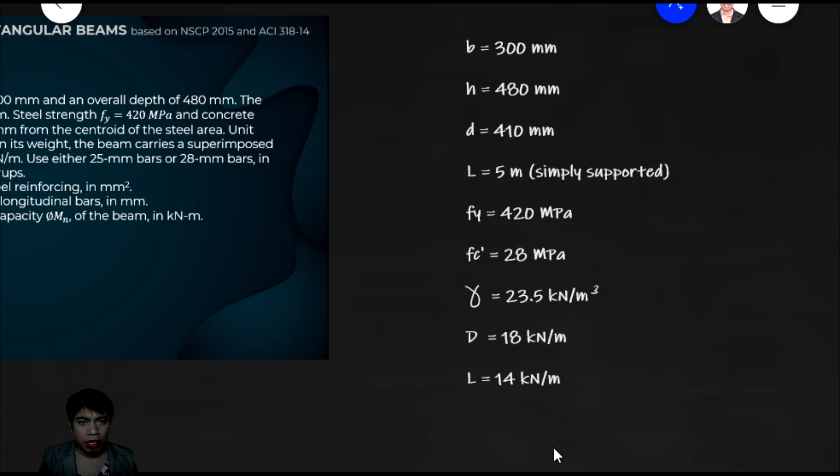So I listed here all the given values. Our beam width is 300 millimeters. Our total depth is 480 millimeters. Let's place this on our beam drawing. So our beam width, B, is equal to 300 millimeters. Then our total depth, H, is equal to 480 millimeters.

Okay, so going back to the problem, it says that the concrete cover is 70 millimeters from the centroid of the steel area. Now in our last video's discussion, I mentioned that concrete cover is measured from the surface of the concrete to the outside surface of the steel bar. But here in this problem, it specifically says it's from the centroid. So this is what we'll follow. But if the problem doesn't specify, we should stick to what's stated in the NSCP or the ACI. In this case, since it's SI units, we'll follow the NSCP.

So anyway, our concrete cover is 70 millimeters from the centroid of the steel area. That means, let's say here is the centroid, going to here is 70 millimeters - this is the concrete cover, 70 millimeters. So that means our effective depth, D, is equal to 480 minus 70, which is 410 millimeters.

So I only placed one bar here for now, since we haven't started designing yet. So anyway, it says here that our length is 5 meters and it is simply supported. Then F sub y, F sub c prime, and the unit weight of concrete are given. This already includes the steel bar.

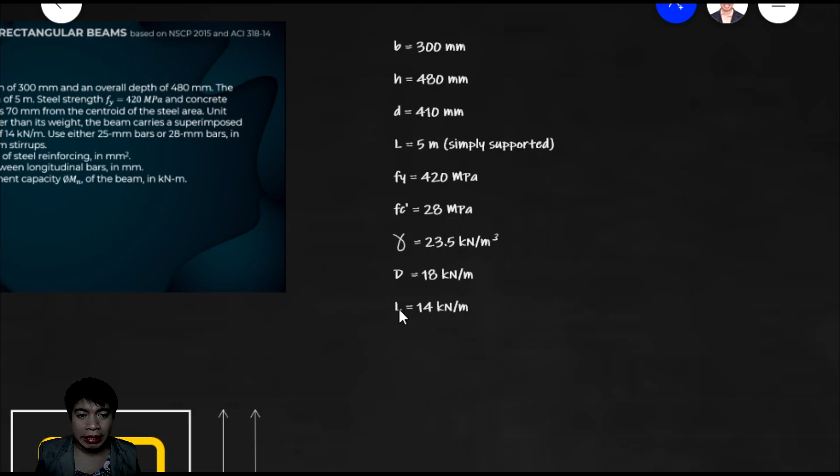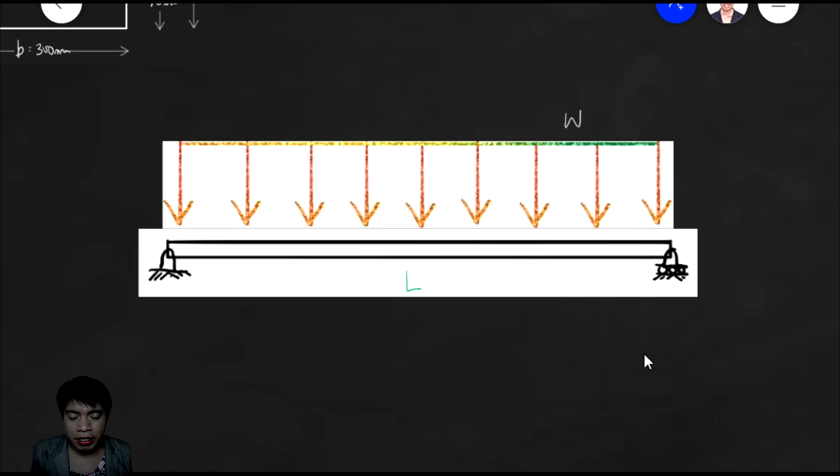And the dead load is also given, that is 18 kilonewtons per meter, and the live load is 14 kilonewtons per meter. So if we notice, our dead load and live load are uniformly distributed loads. That means our simply supported beam is acted upon by a uniformly distributed load, W. Now, as we said in the last video, when we design, what we need to compute is the M sub U.

So, M sub U yung ating gagamitin guys. Take note na yung M sub U, kaya may U dito is dahil this is, kinukuha natin yung moment na to galing sa factor na load. Okay, so ibig sabihin, kung M sub U tayo dito, then WU yung gagamitin natin.

So yung WU, ibig sabihin nun is factored na siya. So meron na siyang mga factored load factors. Ano nga ulit yung maximum na moment kapag uniformly distributed load? That is W L squared over 8. So sa case na to, this will be WU L squared over 8.

So ngayon guys, kailangan natin makuha yung WU. Para sa WU, ang given lamang is dead load at saka yung live load. So dahil given lamang yung dead load at live load, kapag nag-substitute tayo sa mga equations na to, ang magiging critical is itong pangalawang equation, that is 1.2D plus 1.6L. Ito kasi wala tayo naman roof live load at saka rain load, so hindi natin ito i-consider.

Okay, so take note guys na yung dead load nga na given, okay, ano natin guys yung ating mga given.

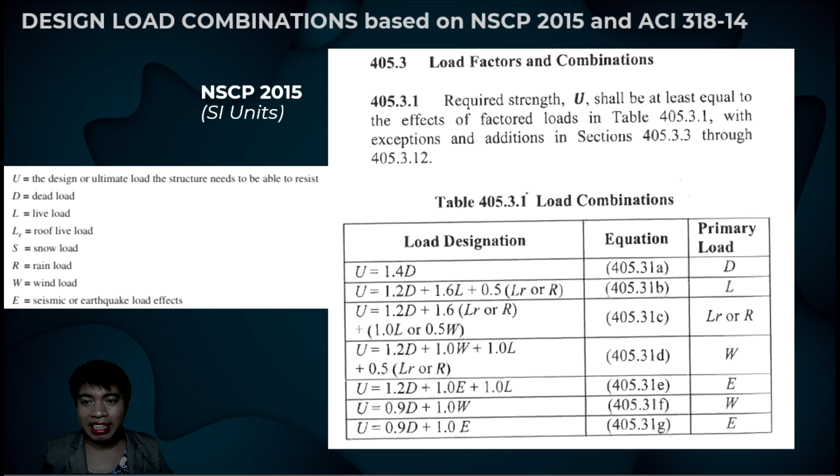So tingnan natin guys yung problem, balikan natin. Ito yung problem natin. Sabi dito, sa may sentence na to, other than its weight, the beam carries a superimposed dead load of 18 kilonewtons per meter. So kaya nga nasabi ko na yung dead load na nandun sa na-given sa problem ay hindi pa kasama dun yung beam weight. So kailangan natin i-estimate guys yung beam weight.

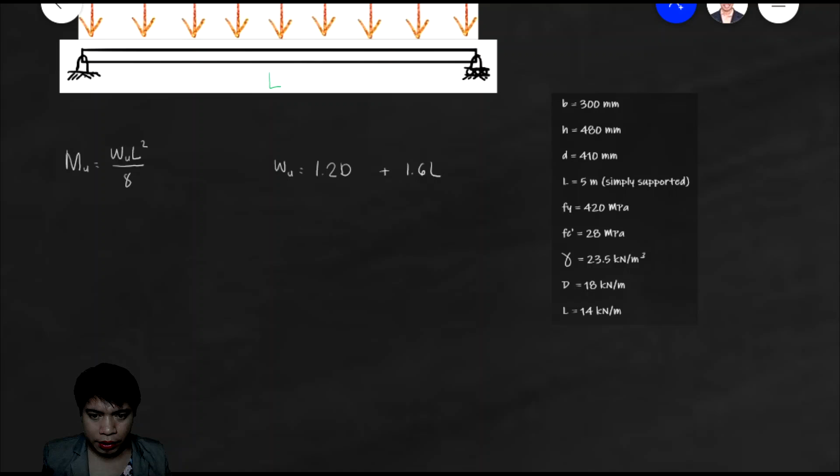Okay, so ang mangyayari dito guys, kung isasama natin yung beam weight, magiging WU is equals to 1.2 times dead load, total dead load itong D, plus yung beam weight, then plus 1.6L. Take note kasi yung beam weight must be included sa dead load, itong buo man yung ating dead load. So ngayon ay alam natin yung dalawa, D at saka L.

So ngayon ay i-estimate natin o i-compute natin guys yung beam weight. This is beam weight ha. Okay, so para sa pagkuha ng beam weight guys, ang kailangan natin gamitin dito is yung kilonewtons, itong 23.5 kilonewtons per cubic meter. So dapat makaride tayo guys ng unit na kilonewton per meter.

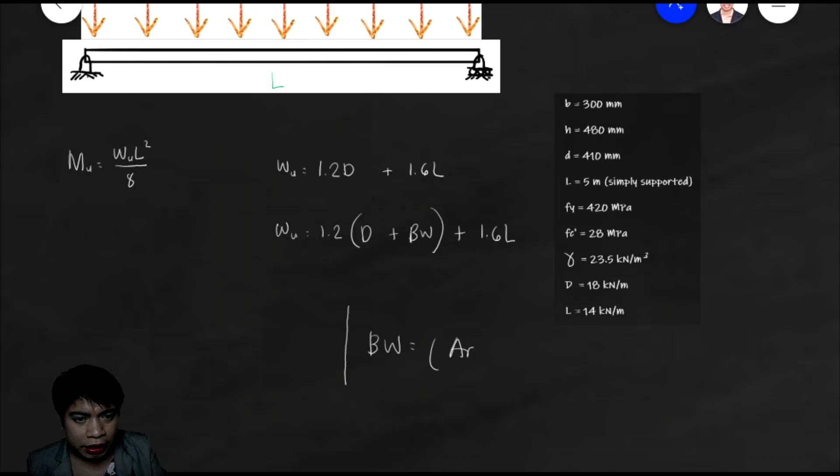So para makaride tayo ng kilonewton per meter na unit, all we have to do is i-multiply natin yung cross-sectional area ng beam sa unit weight. Kasi yung unit nito is square meter times yung ating unit weight, that is kilonewtons.

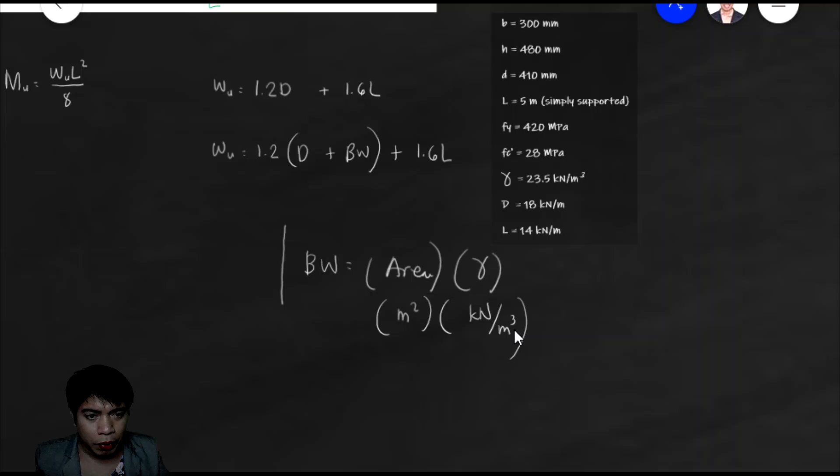Per cubic meter. So ang mangyayari guys dito, kung yung area nga natin is square meter, then our unit weight is eto, then maka-cancel si square meter and ang matitira na lang is kilonewton per meter, which is same dito. Dapat kasi same, kilonewton per meter kasi nga nagko-compute tayo ng WU, that is a uniformly distributed load.

So yun, bali yung ating beam weight nga is equals to, yung cross-sectional area natin guys is yung beam width times the total depth na 480. So 300 millimeters times 480 millimeters. I-convert na lang natin siya to meter. So ang mangyayari is 0.3 meter times 0.48 meters times unit weight natin is 23.5 nga, this is in kilonewtons per cubic meter. Okay, so dito mako-compute natin guys yung beam weight.

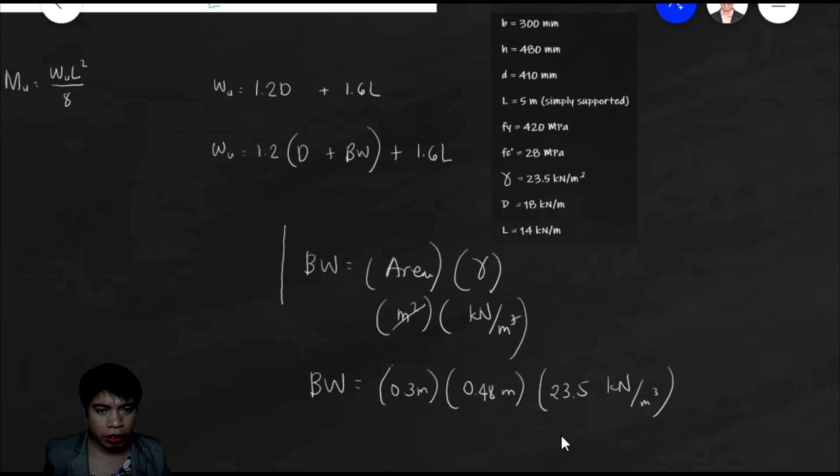At ang lalabas na beam weight nga is equals to, paki-compute na lang sa inyong calculator, 3.384. This is in kilonewtons per meter. So eto nga guys na yung ating beam weight. Okay, so ngayon na-compute na natin yung beam weight, then we can now compute for our WU. All we need to do is to substitute guys. Si dead load natin ay 18, beam weight is 3.384.

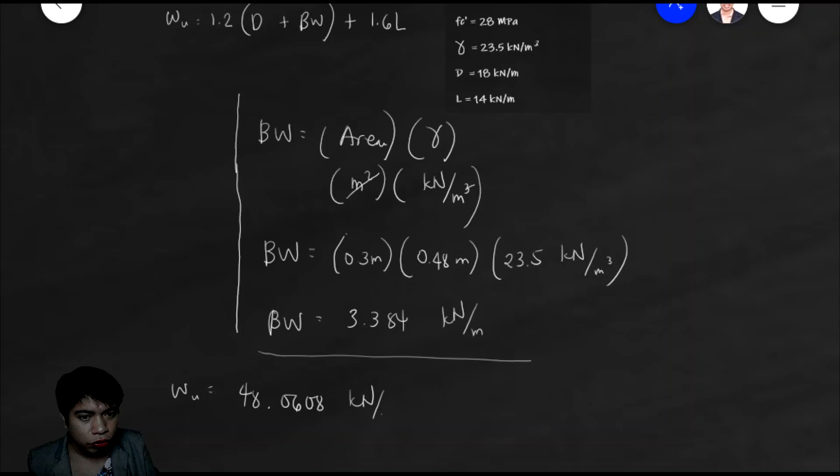Plus 1.6 times the live load. So ang mangyayari dito, this will be equal to 48.0608 kilonewtons per meter. So WU pa lang to guys, no?

Take note na ang ating purpose dito is pakuha si M sub U. So i-compute natin ngayon si M sub U. Wait lang para hindi magulo yung ating solution. Let's now compute for M sub U gamit itong formula, yung WU L squared over 8. So yung L natin of course is 5 meters.

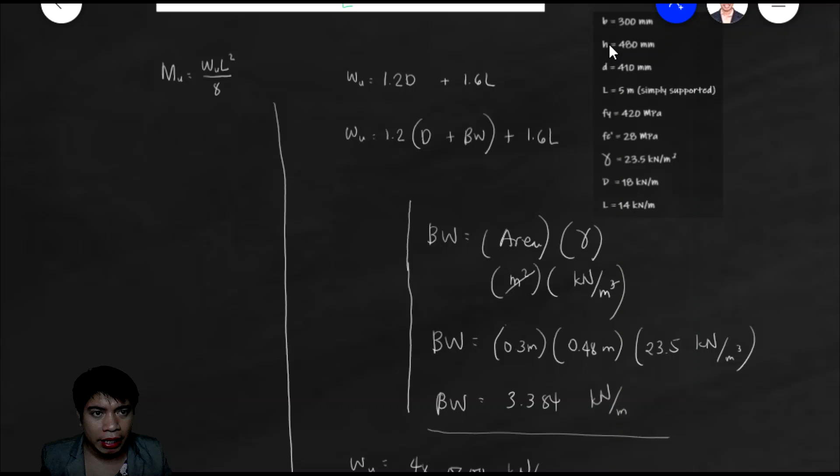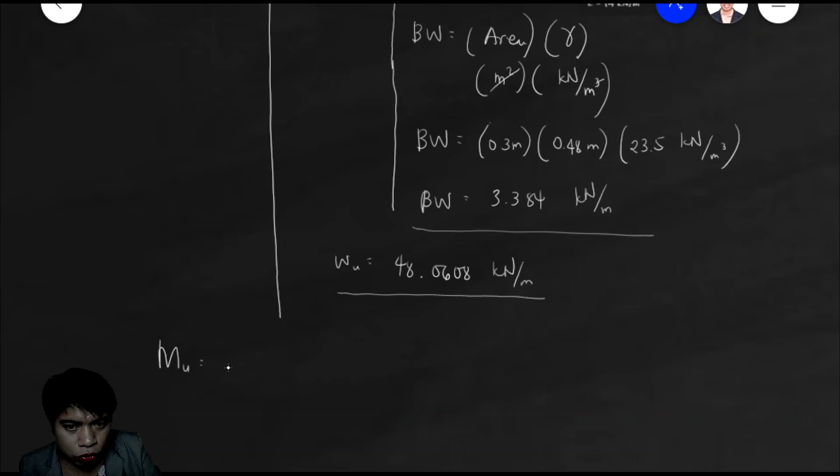So ang mangyayari, MU will be equal to 150.19. Pa-compute na lang guys sa inyong mga calculator, no? MU is equals to 150.19, and this is in kilonewton meter. So ito na yan guys yung gagamitin natin na M sub U, para sa pagde-design ng ating beam.

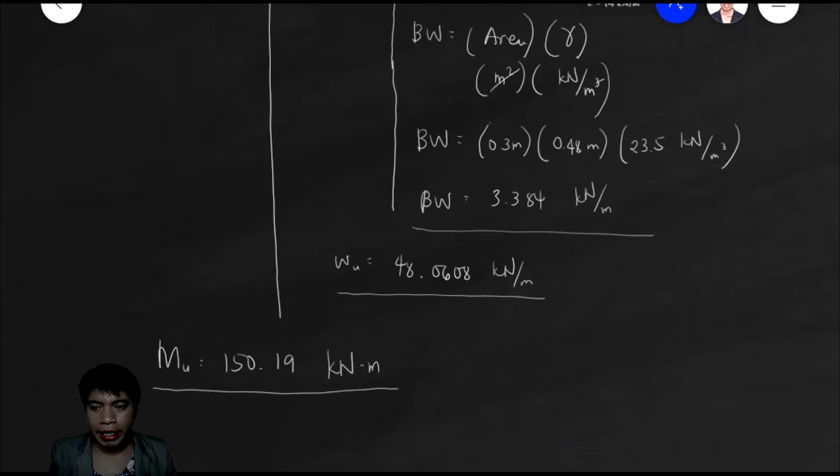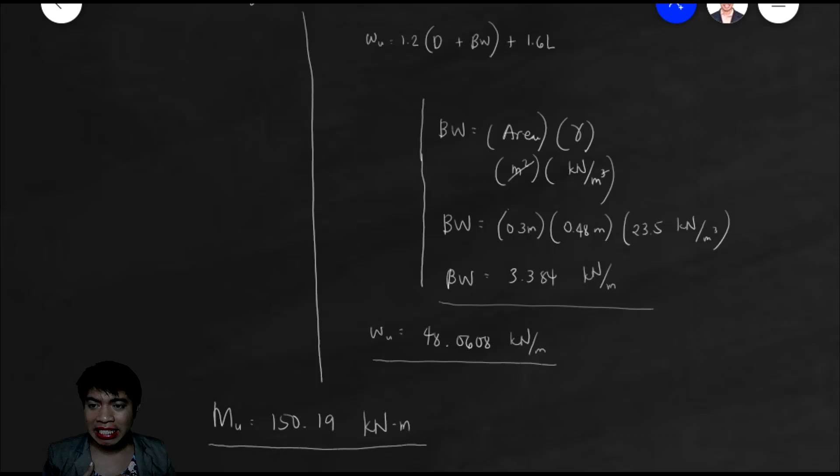So ngayon guys, na-compute na natin ngayong value ng M sub U, then ano na yung gagamitin nating formula para makapag-design? So balikan natin yung mga formula na diniscuss natin sa last na video. So ito yun guys, no?

Kailangan kasi natin guys, after makompute si M sub U, kailangan natin makompute yung ating steel ratio. Take note kasi ang kailangan natin dito is mag-design nga ng ating steel bar. So kailangan natin ng steel ratio para magamit natin, para makuha natin yung AS mamaya. Kasi nga yung steel ratio is related sa area ng ating steel.

Okay, so it's either ito yung gagamitin natin guys, no? Kung ito yung gagamitin natin, hindi kasama pa to. Meron tayong dalawang choices nga guys. Yung unang choice natin is itong dalawang formula gagamitin natin. Yung pangalawang choice is itong isang formula yung gagamitin natin. I hope nakikita nyo siya.

Kung ito yung gagamitin natin guys, take note, medyo magulo itong formula na to kasi una, kailangan mo ng calculator na may shift solve, kasi yung lalabas dito is quadratic equation siya. At take note, dapat ang pipiliin mong value ng rho dito is yung mas maliit, hindi yung mas malaking value ng rho.

Okay, anyway, so ito na lang muna yung gamitin natin guys. Sa susunod na example, ito naman yung gamitin natin. Pero sa ngayon, ito na lang muna yung ating gamitin. Kinopya ko na dito guys yung ating formula na gagamitin natin sa pag-compute nga ng rho.

Ito nga yung rho, that is 0.85. Kinopya ko na dito guys yung formula na gagamitin natin sa pag-compute ng rho. Ito nga, rho is equals to 0.85 f sub c prime over f sub y, multiplied by 1 minus square root of 1 minus 2Rn over 0.85 multiplied by f sub c prime.

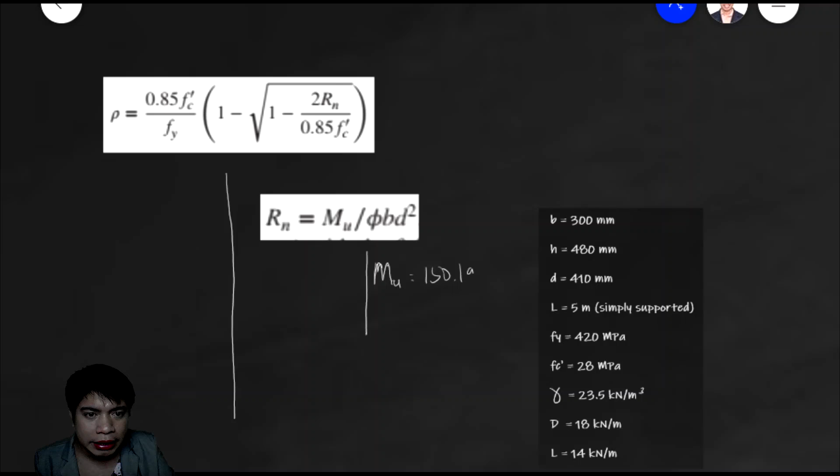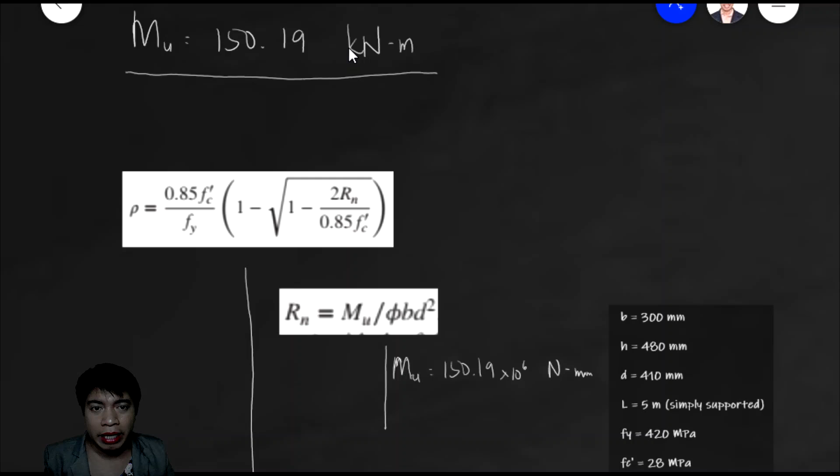Ito yung guys nasa taas, this is in kilonewton meter. So i-convert natin siya guys to Newton millimeter. Ang mangyayari is magiging 150.19 times 10 to the 6th, and this will be in Newton millimeter. Kasi kaya siya times 10 to the 6 guys, kasi may kilo dito tapos yung meter is 1,000 millimeters. So 3 tapos 3, that is times 10 to the 6. Ayun, so yun na nga guys.

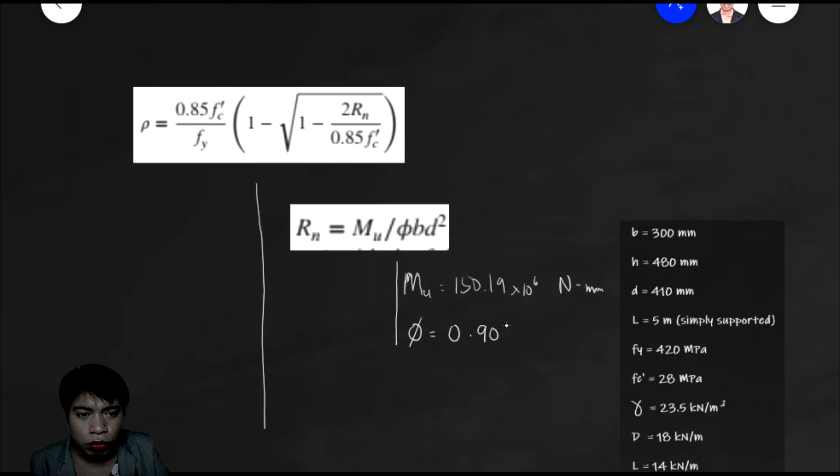Tapos, yung phi natin guys is, syempre, since nagdi-design tayo, dapat dinidesign natin siya as tension control. Kaya 0.90 yung gagamitin nating phi. Tapos, of course, given na yung ating B at saka yung D, that is 300 at saka 410. So dito makukuha natin guys si R sub N, pakisubstitute na lang natin.

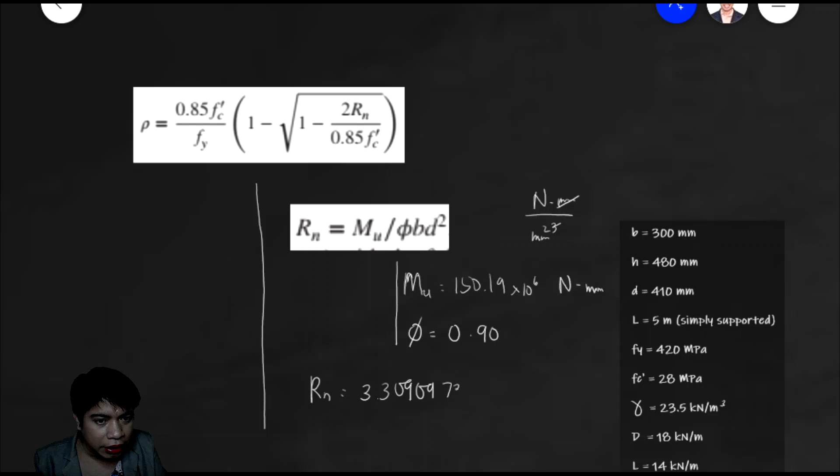So ano yung magiging unit natin dito? This will be Newton millimeter sa taas, tapos millimeter cube sa baba. Maka-cancel sa 1 millimeter, so magiging megapascal yung ating unit ng R sub N. Yung R sub N natin dito guys will be 3.309. Kopyahin ko lang lahat ng ating decimal ha, para exact yung ating lalabas sa sagot. 3.309097319. So this is in megapascal. Okay, that is R sub N pa lang yan guys.

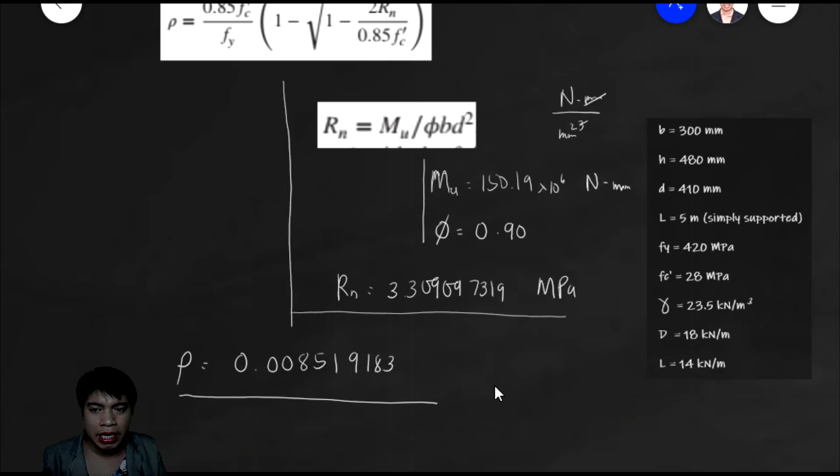Ayun, so yun lang naman yung wala tayong given, no? Dito sa formula na to, yung f sub c prime at saka f sub y is given na naman sa ating problem. So ayun, makakompute na tayo ngayon ng ating rho, at ang lalabas nga na rho is equals to, compute guys, 0.008519183. Ito na nga yung ating value nga ng rho. Okay, hindi pa yan yung tinatanong sa problem, guys, kasi yung tinatanong sa problem is yung required na steel area.

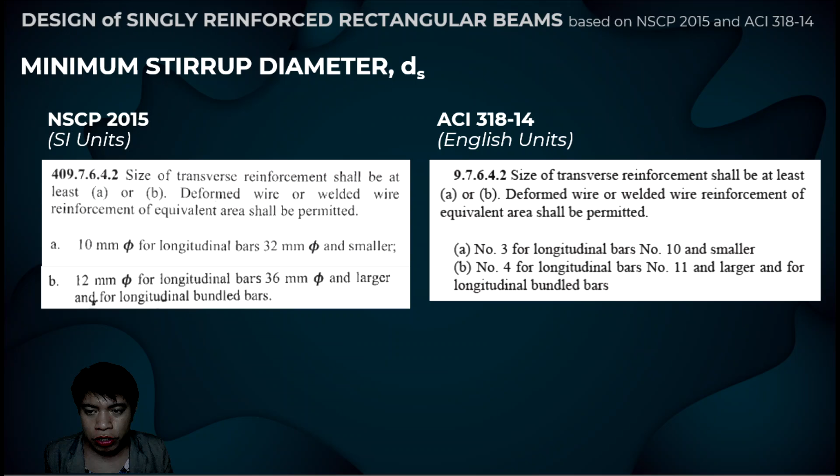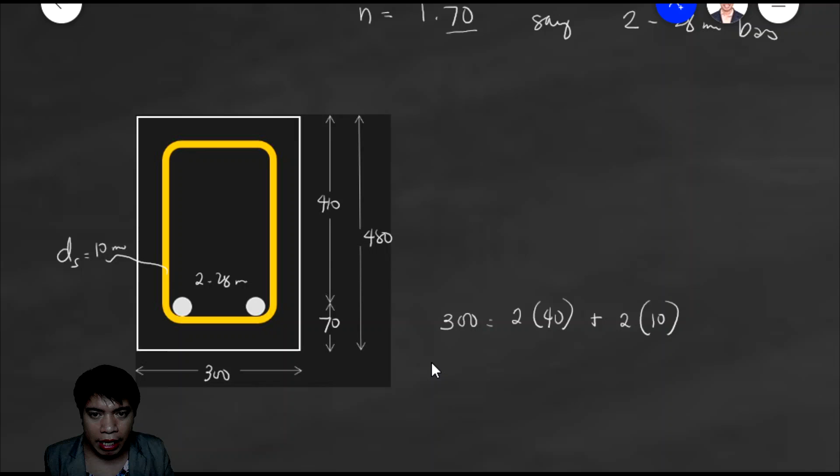So 10 millimeters is still what we'll use for stirrup diameter. Let's place that here, D sub S equals 10 millimeters. So same as before, our B equals two concrete covers of 40 plus two stirrup diameters of 10, plus two inside radii — our inside radius is 2ds, so 2 times 10 — plus two 28mm bars, plus one space between the bars, which is S.

Now we can compute for S, and the answer here is S equals 104 millimeters. Again, this must be greater than or equal to — according to NSCP, we compare it to the greater of 25 millimeters and the bar diameter. Our bar diameter is 28 millimeters, so 28 is bigger. So now our spacing is sufficient.

So therefore, let's use the 28 mm bar. So this, guys, is the spacing being asked in letter B. Okay, so this is the answer.

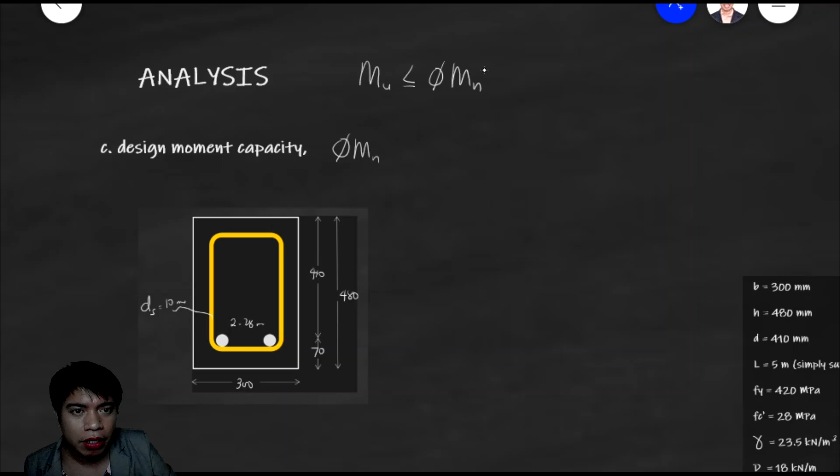Again, when we analyze, we need to get the PhiMn, and we also need to prove that at the end, Mu must be less than or equal to PhiMn. So let's get the PhiMn first. For getting PhiMn, of course we need phi, right?

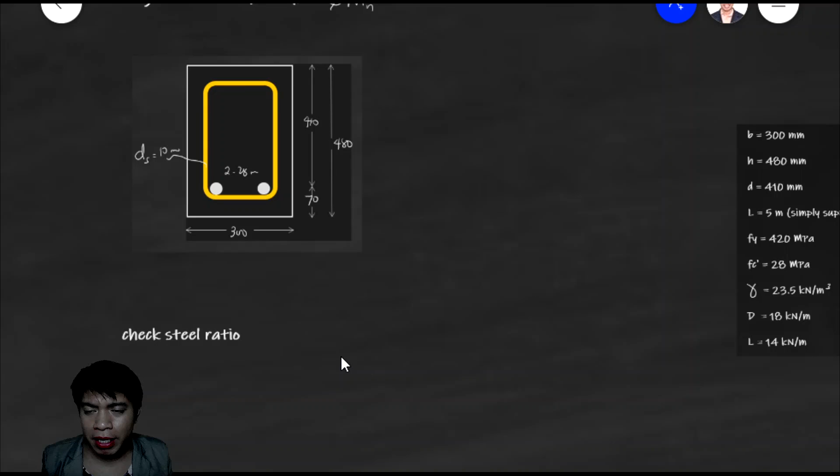So this is our final design. First, let's do the same process as in our previous videos on analysis. So let's check the steel ratio first. What's the formula for that? The steel ratio is equal to As over bd.

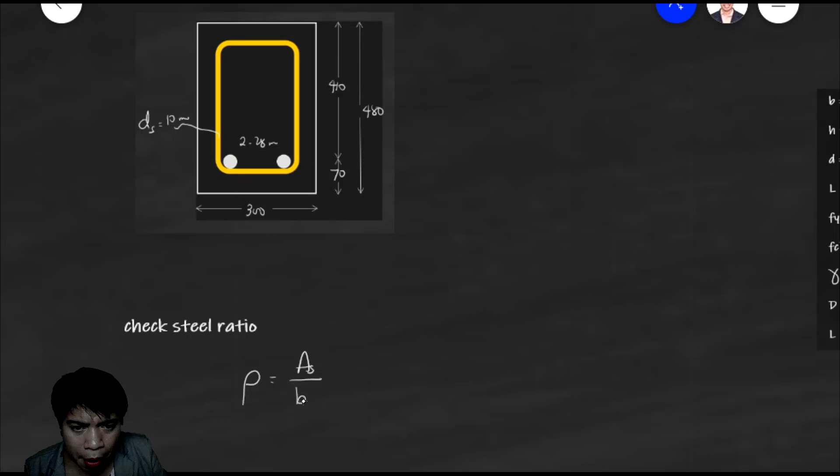So our As is equal to pi over 4 times 28 squared times two bars. So the area of steel we get is 1,231.50 square millimeters.

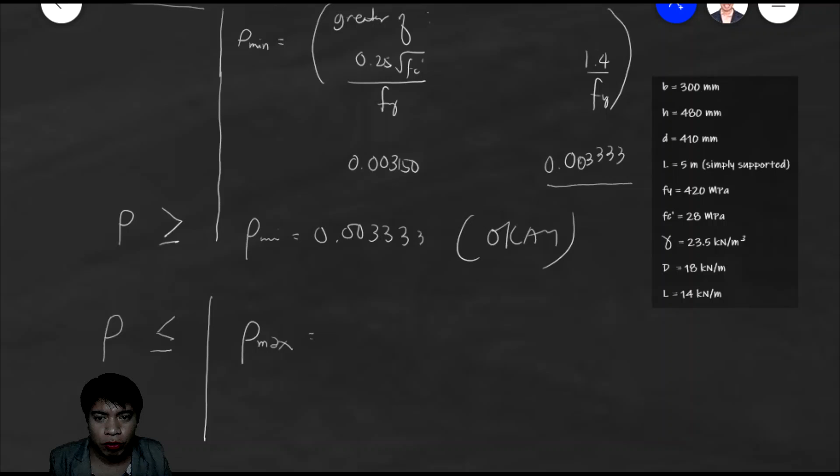Okay so na-compute ko na guys. So ating rho maximum, okay, para makuha nga yung rho maximum, wait lang ha. Sabi nga dito guys, para makuha natin yung rho maximum, that is the value of rho when the tension strain is equals to 0.005.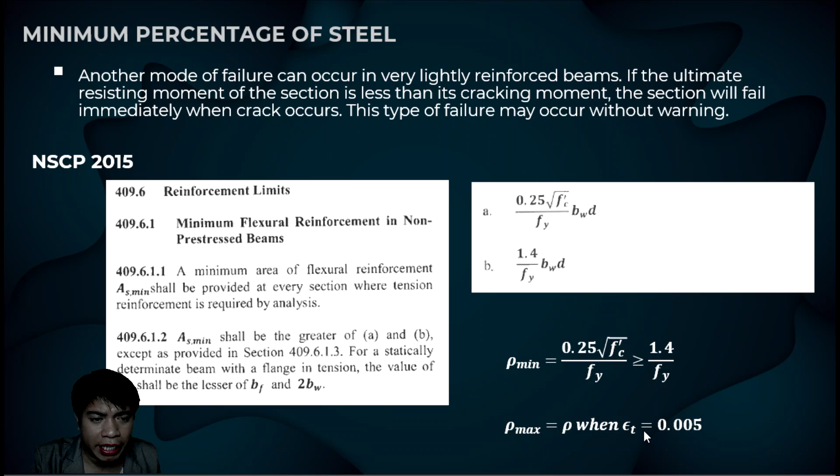So ayun, so yun yung ginawa ko, ito yung ginawa ko guys. So of course, yung ating concrete strain is 0.003 and 0.005 yung ating tensile strain. Okay, so bali kinuha ko muna yung C, tinawag ko siyang C max kasi ito yung gagamitin natin sa pagkuha ng rho max. So of course, ratio and proportion lang guys, ito yun. So nakuha ko si C max, ayun, ito na nga yun.

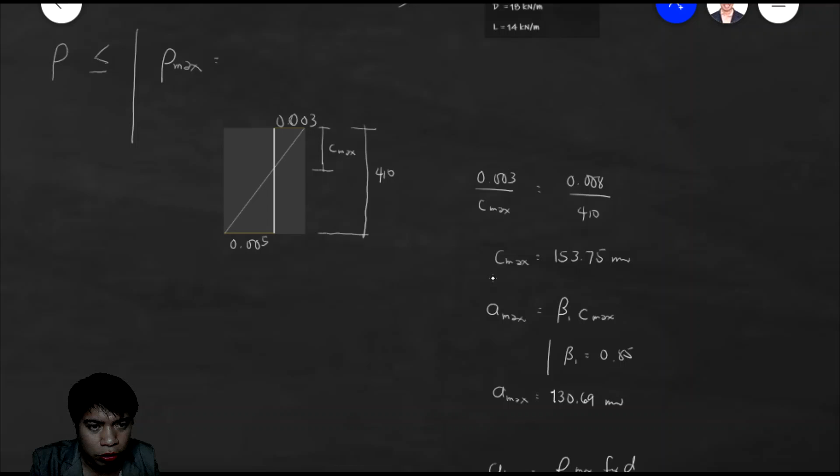And then, gamit itong formula, that is A is equals to beta 1 times C. Alam natin to, no? A is equals to beta 1C. Okay, so sabi natin kasi guys that A is equals to beta 1C. So ayun, yun yung ginamit natin para makuha si A max. So 130.69 nga yung ating A max.

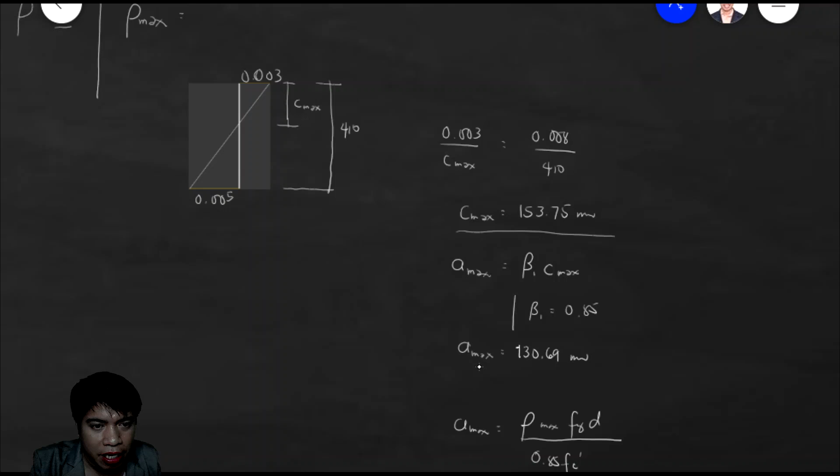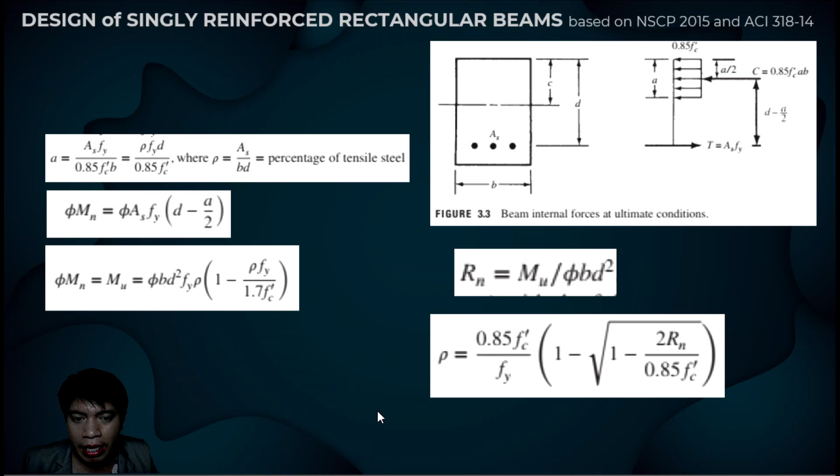Okay, then yung A max na yan is ginamit natin naman sa pagkuha naman ng rho max. Kasi sabi natin guys that A is equals to rho FYD over 0.85 F sub C prime. So gamit tong formula guys ng sa A, then na-compute nga natin yung ating rho max. Ito na nga guys, A max equals to rho FYD over 0.85 F sub C prime. Okay, so rho max natin is 0.01806.

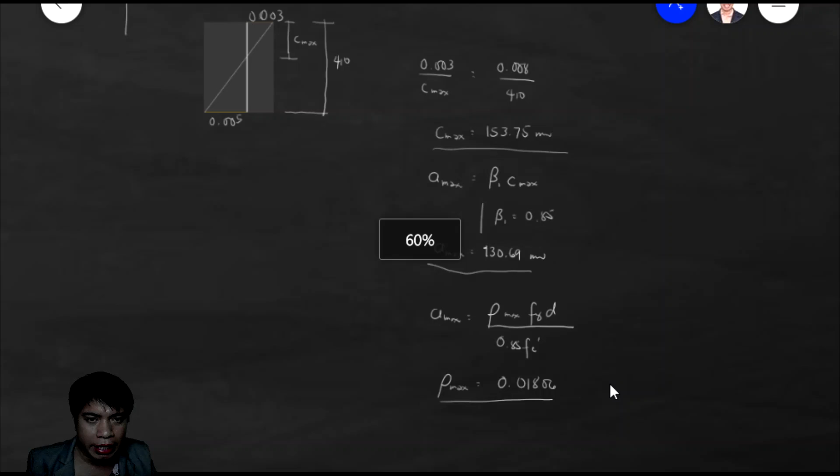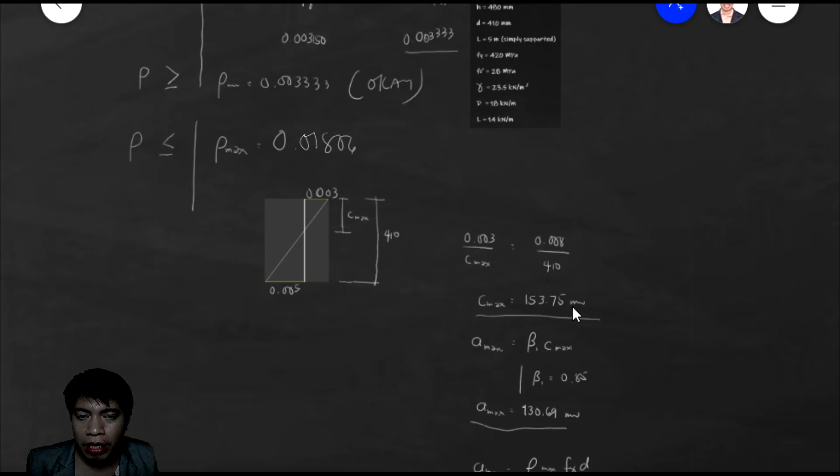Okay, so ano lang natin dito guys, 0.01806. So dapat yung rho natin must be less than kay rho max. So ano nga yung ating value ng ating rho? So yung ating value ng rho is 0.01001. So ayun, mas maliit siya kaysa kay rho max.

Okay, ayun. Okay, so ngayon guys, since nakuha na natin, na-check na natin si rho, so okay man siya sa both minimum at saka sa maximum, then I think, sabi nga natin before, this is an indication na tension controlled nga siya.

Okay, so ngayon, kailangan nating makuha nga guys, di ba, kinukompute natin dito yung phi Mn, di ba? So kailangan nating makuha dito yung value ng phi. Para malaman natin yung value ng phi, edi dapat alam natin kung tension control talaga siya or compression control or transition. So kailangan nating ma-compute, di ba? Yung basihan kasi ng pagkuha ng phi, ng pag-determine kung tension control siya or compression control, is yung tension strain.

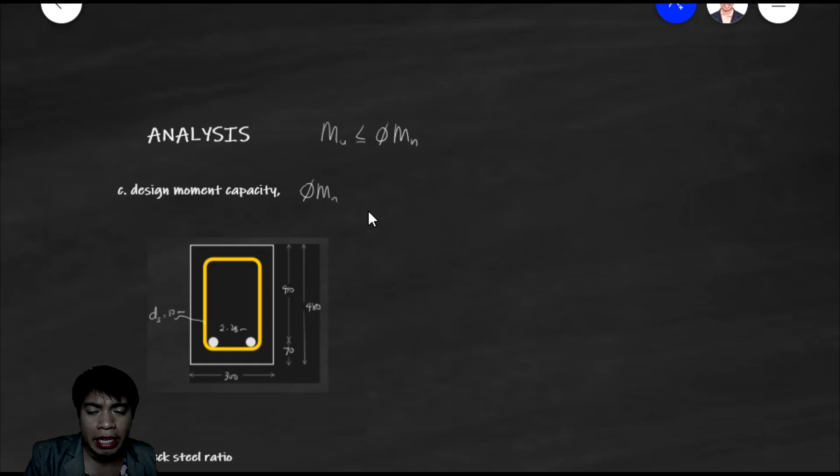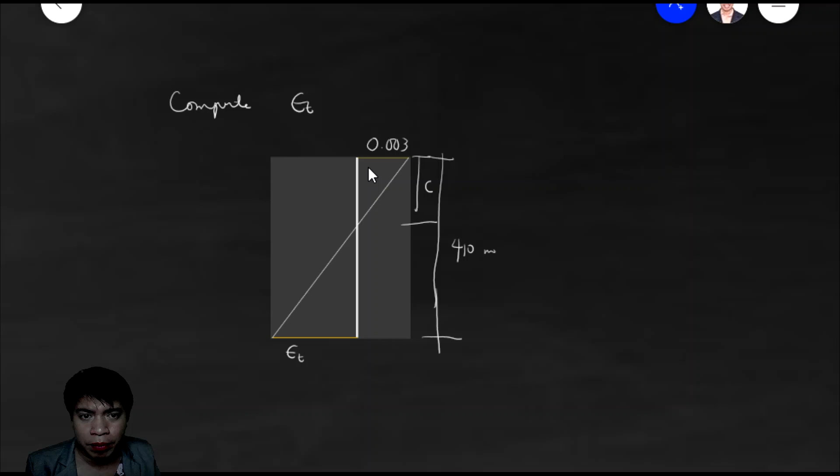So kailangan natin i-compute guys yung ating tension strain. Okay, i-compute natin ngayon guys yung ating tension strain. So para ma-compute natin yung tension strain, again, mag-strain diagram tayo. 0.003 sa concrete and then the tension, ito yung ating i-compute.

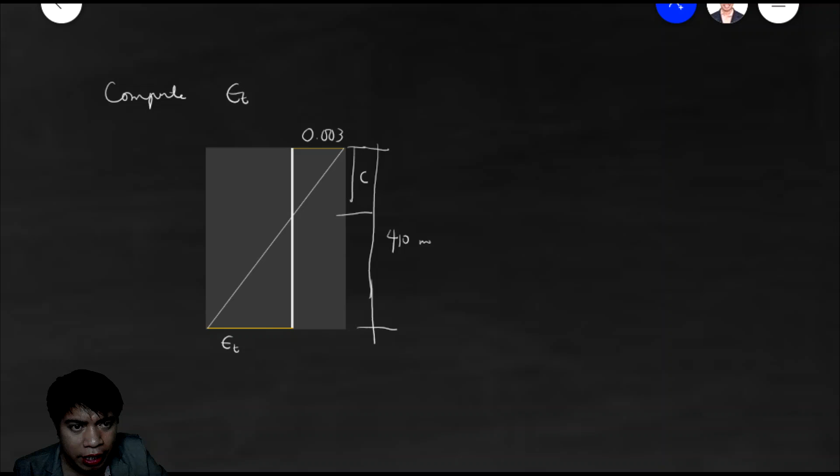Okay, so ratio and proportion lang guys. Bubuuin natin itong triangle, itong malaking triangle na dito, that is tension strain plus 0.003 divided by 410. Okay, so ito nga divided by 410 is equals to 0.003 divided by C.

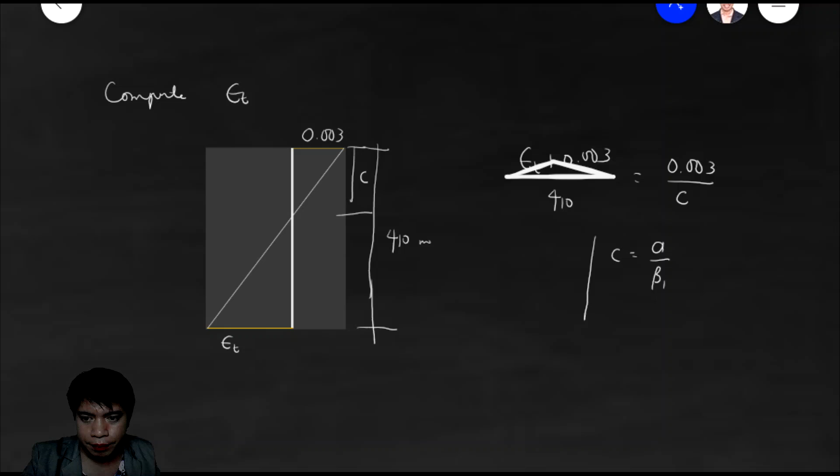So kung meron tayong C, makukuha natin si tension strain. So of course, C is equals to A over beta 1. Ayun, we know that, wait lang. And we also know that A nga is equals to rho times F sub Y times D divided by 0.85 of F sub C prime.

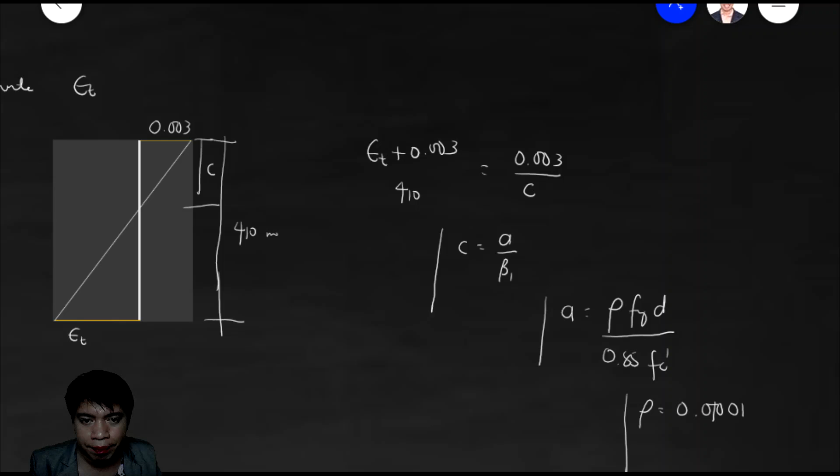So of course guys, na alam na natin yung row kanina, this is 0.01001, so ito yung ating value ng row. And yung f sub y, d at saka f sub c prime is already given sa problem. So ayun, dito makukuha natin guys si a. So makukuha natin dito si a at ang lalabas nga na value ng a is equals to

72.43 millimeters. Okay, tapos of course, yung purpose natin ng pag-compute ng A para ma-compute si C. So of course, kailangan natin ng beta 1. So beta 1 natin is 0.85, di ba? Kasi 28 megapascal lang naman yung ating F sub C prime, di ba? Naalala nyo guys, na kapag 28 megapascal yung ating F sub C prime, then 0.85 yung ating beta 1. Okay, so ayun, bali no, then we can now compute for the value of C.

Okay, so C nga is equals to 85.21 millimeters. So ayun, na-compute natin guys si C. Okay, then since na-compute natin si C, then pwede natin gamitin itong ating equation sa taas, that is yung ratio and proportion nga natin, that is tension strain plus 0.003 divided by 410 is equals to 0.003 over C.

So dito makakompute natin guys si tension strain. And tension strain is equals to 0.0, wait lang ha, iko-compute to guys.

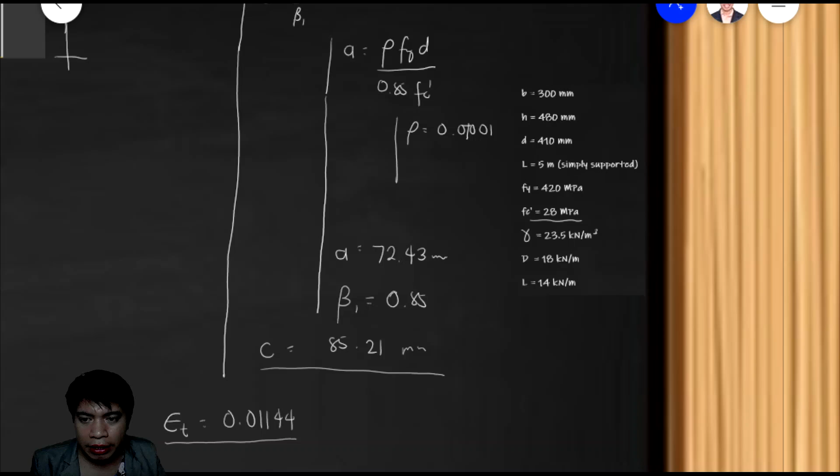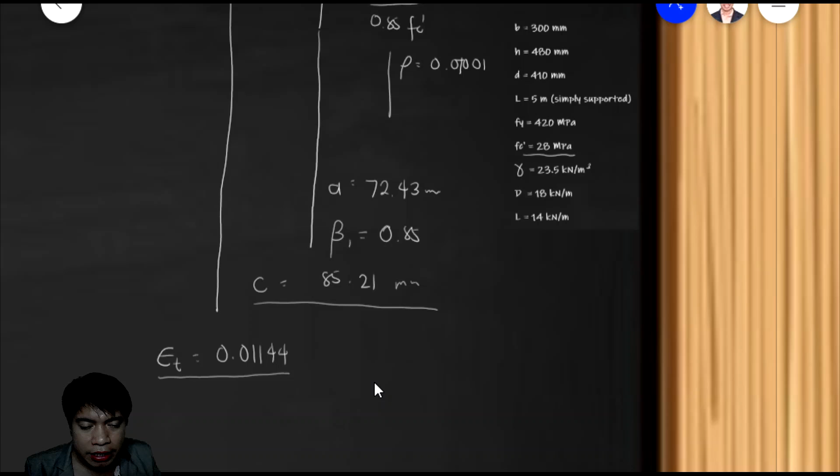Okay, so it's 0.01144. Okay, so that's our tension strain. Take note of our classification. Let's go back to it: when the tension strain is greater than 0.005, then it is tension controlled. So since ours is greater than 0.005, this is tension control.

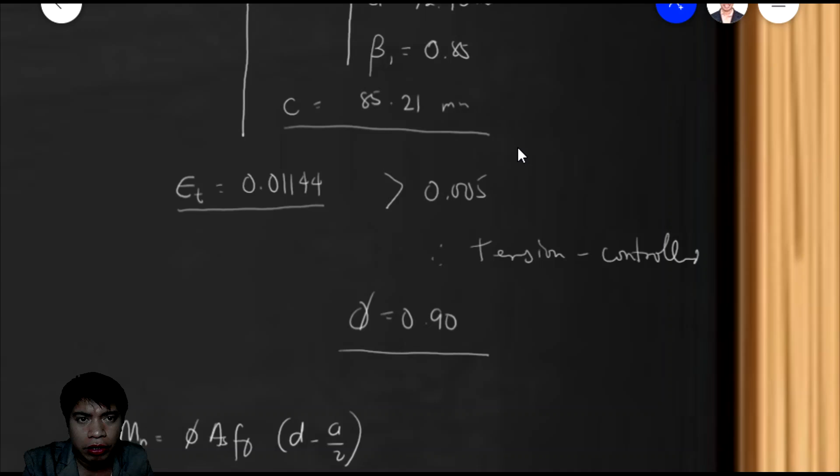So let's substitute: our phi is 0.90, As we computed earlier is 1,231.50, and a we computed above is 72.43. D of course is 410.

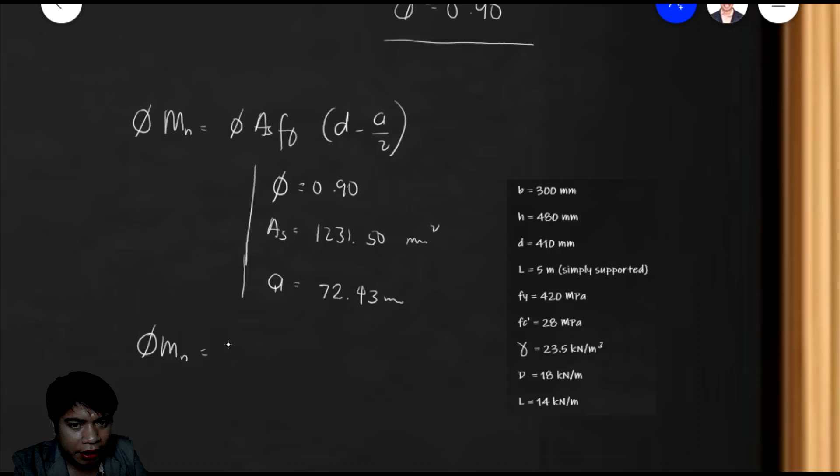So here we can compute phi Mn. Phi Mn equals... wait. The resulting unit here is Newton-millimeter: 173,999,534 Newton-millimeter. We need the unit in kilonewton-meter, so this becomes 174 kilonewton-meter. That's our answer for number 3.

Number 3 says: determine the design moment capacity phi Mn of the beam in kilonewton-meter. So that's the answer to letter C.

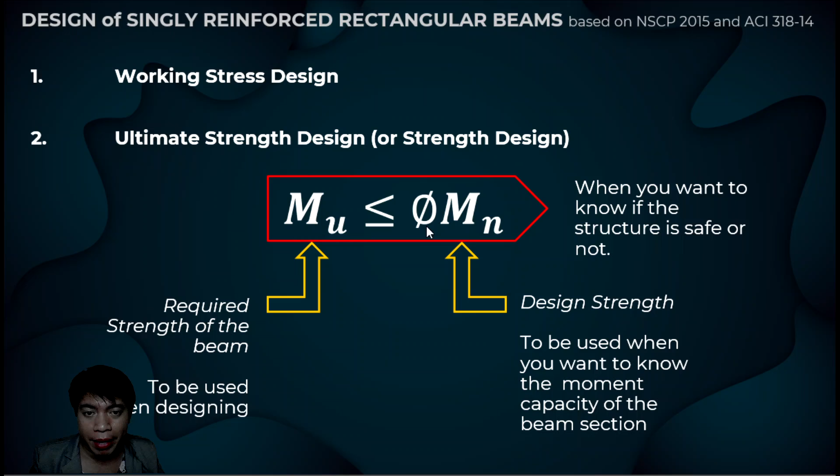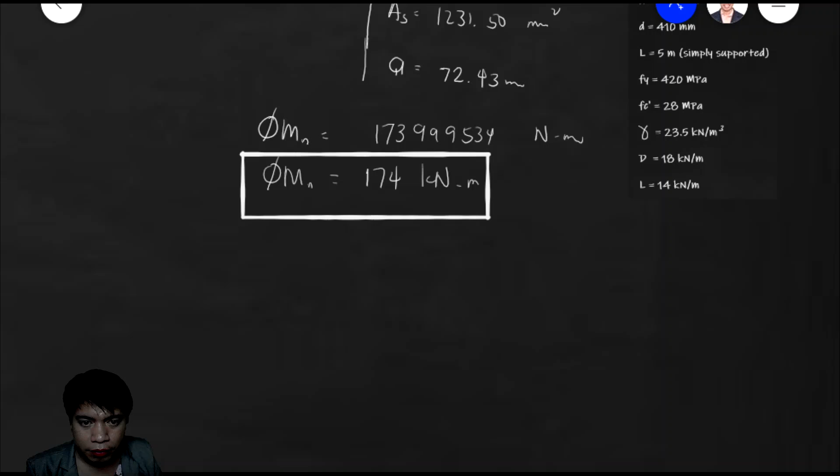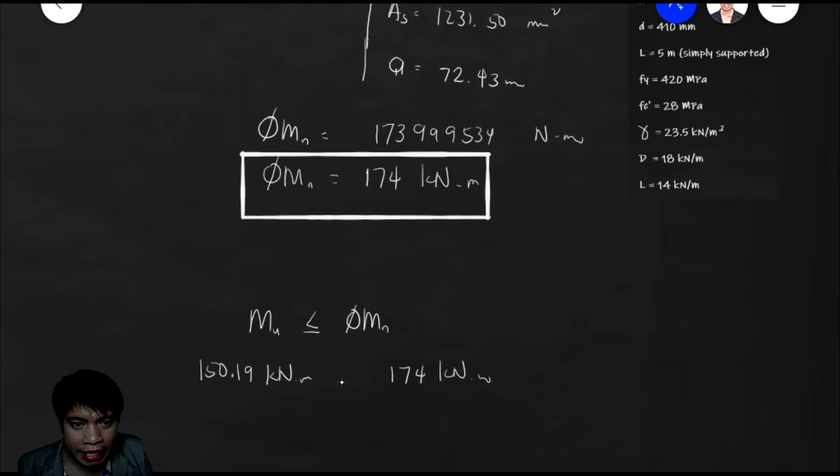Now let's compare Mu and phi Mn. What should happen is that Mu must be less than or equal to phi Mn. Mu was computed earlier in the first part of our solution, which was 150.19 — that's WuL squared over 8, in kilonewton-meter. And this one is 174 kilonewton-meter. So Mu is less than phi Mn, therefore our beam is safe.